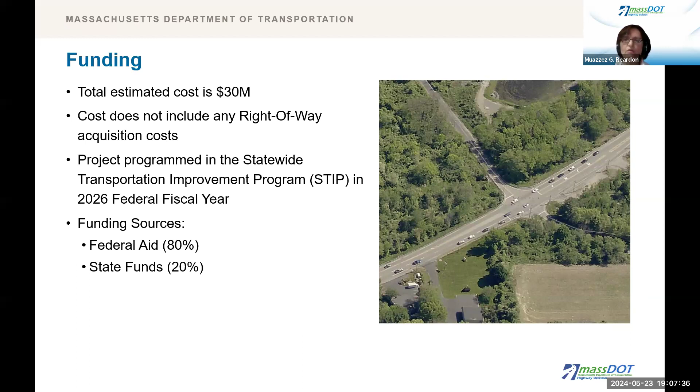We will be introducing the project, provide some history, what we are trying to accomplish, and provide information on the design. At the end, we will review our next steps and also have time for comments and questions.

The project is located on Route 20 in Shrewsbury and stretches 1 mile from the Green Street, South Street intersection to the Valente Drive intersection. For purposes of defining the existing and proposed roadway configuration, the project is split into 2 portions, the eastern portion and the western portion, divided by the wetland area near the middle of the project. The western half of Route 20 consists of 1 eastbound travel lane and 2 westbound travel lanes. The eastern half consists of 2 travel lanes in each direction.

In addition to evaluating the corridor, 6 major intersections were evaluated for improvements.

Previous to this project, MassDOT and the town prepared a master plan for transportation improvements to address existing issues and support economic development of the Route 20 corridor within Shrewsbury. In March 2020, the final public meeting was conducted for the master plan. The preferred concepts derived from public meetings showed support for shared use paths, sidewalks, and turning lanes to improve safety and congestion issues.

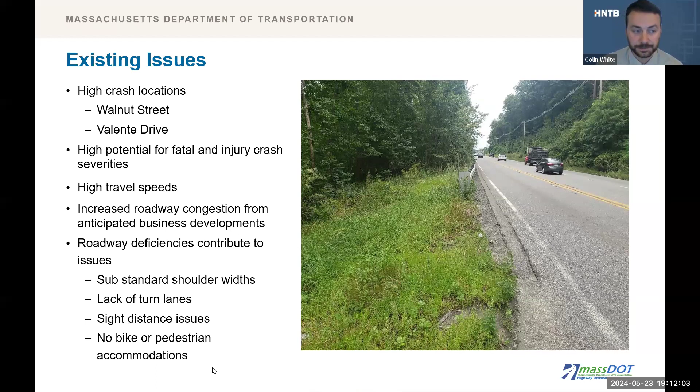So MassDOT and HNTB took a close look at the crash history of the project area. In the western portion of the project, many of the crashes were due to general congestion, left-turning vehicles onto Route 20, and the traffic signal at the South Street and Green Street intersection.

However, it was found that most of the crashes in the eastern portion of the project involved a vehicle turning left, either into or out of a side street or driveway. In fact, almost 3/4 of the crashes involved a left-turning vehicle.

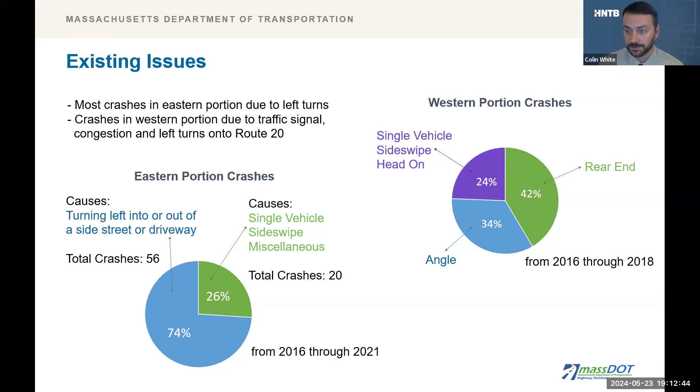So, what do we want to accomplish given these existing issues and roadway deficiencies? The purpose of this project is to improve traffic safety for all road users, including non-motorists, along Route 20 from the Green Street, South Street intersection to the Valente Drive intersection. To reduce high travel speeds, to accommodate future traffic conditions with respect to planned developments, and to improve congestion issues within the project area.

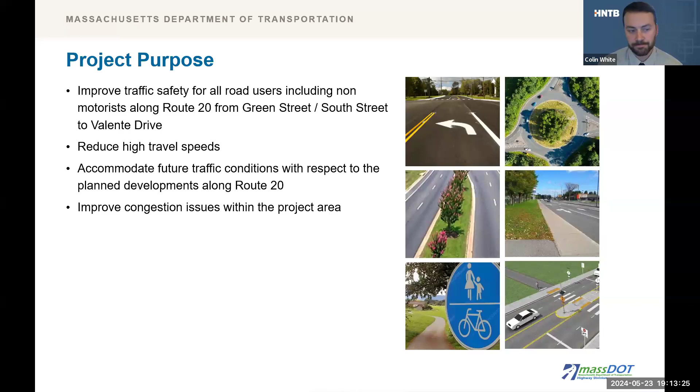So now I can get into some of the alternatives that were considered when we were starting to think about the design for this corridor. But before that, I'd like to show the existing cross sections along the roadway.

Here you can see in the western portion at the top, there's 3 lanes, one travel lane eastbound and 2 travel lanes westbound. There's also a traffic signal at the South Street and Green Street intersection. And then in the eastern portion, on the bottom of your screen, there's 4 lanes, 2 eastbound and 2 westbound.

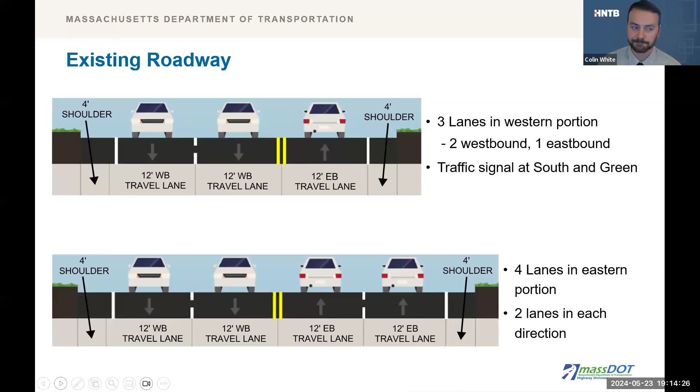This slide shows the existing control at each intersection. The South Street and Green Street intersection is signalized. And then on the bottom left, the South Street East intersection is not signalized, and left turns out are prohibited. So it's right out only.

The Walnut Street intersections are slightly offset and both not signalized. And then bottom right, the Valente Drive intersection is not signalized, and both left turn and through movements out of Valente Drive are prohibited.

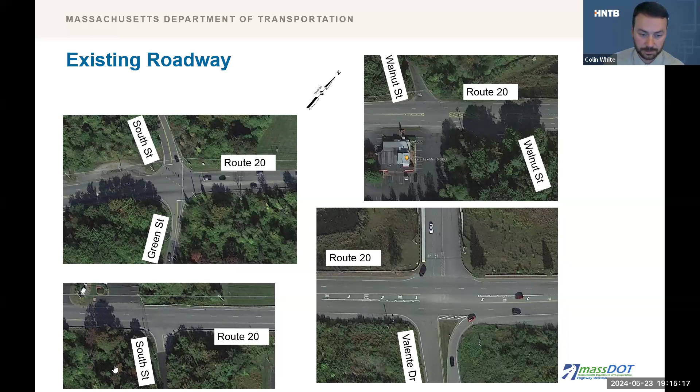So, alternative 1. This is a preferred alternative from the Shrewsbury Master Plan study, with some minor adjustments to the cross-section dimensions to meet current MassDOT standards. This alternative provides a shared use path for pedestrians and cyclists on the south side of the road, and a sidewalk for pedestrians on the north side.

The western portion of the project includes the addition of a second eastbound travel lane, dedicated left turn lanes at select intersections, and the existing traffic signal at the South Street and Green Street intersection is improved, with a new traffic signal proposed at the Valente Drive intersection.

On the eastern portion of the project, a 2-way left turn lane is provided for this alternative.

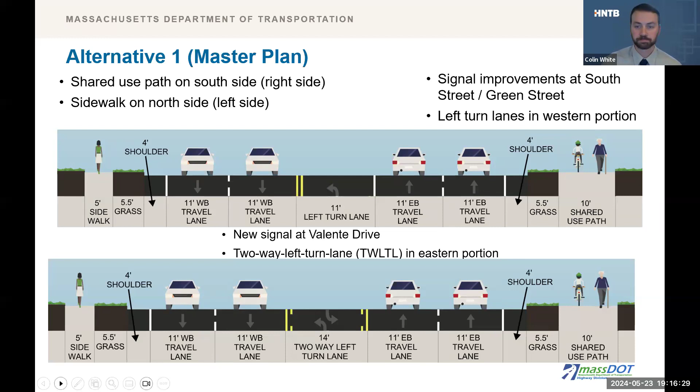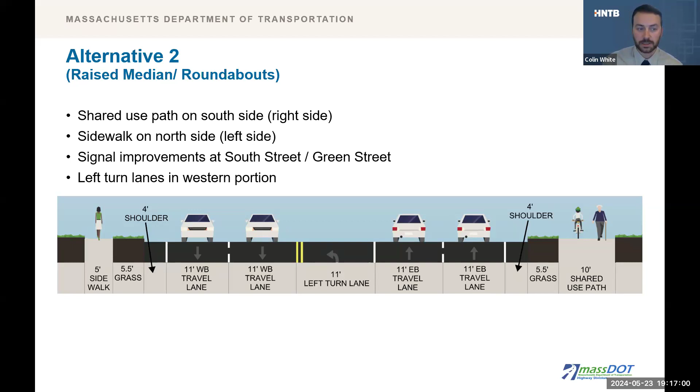So alternative 2 builds off of the master plan alternative. As in alternative 1, there's a shared use path for pedestrians and cyclists on the south side and a sidewalk for pedestrians on the north side. Also similar to alternative 1, signal improvements and additional turning lanes would be provided at South Street, Green Street, and the South Street East would remain right out only.

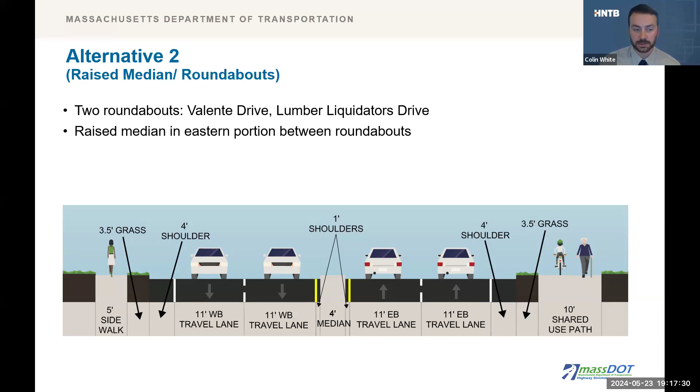However, alternative 2 proposes a roundabout at the Valente Drive intersection instead of a traffic signal, and a second roundabout is proposed near the middle of the corridor. Instead of a two-way left turn lane in the eastern portion, a raised median is proposed between the two roundabouts. This is the main difference between alternatives 1 and 2.

So what's the preferred alternative? The preferred alternative is alternative 2. MassDOT selected alternative 2 as the preferred alternative based on several factors, including safety, the ability to address the purpose of the project, and environmental considerations.

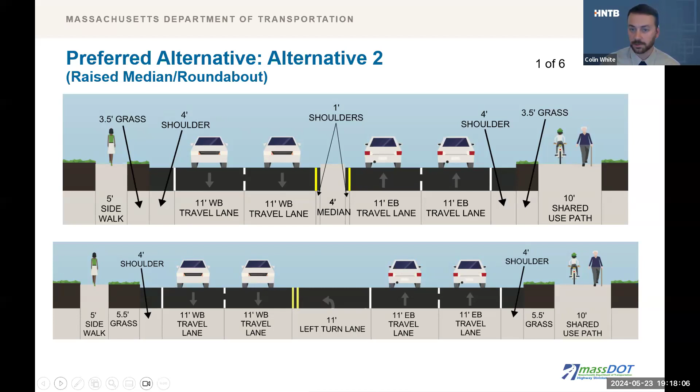Now we can take a closer look at the proposed improvements for the different areas within the project. So we can start at the western end of the project, at Green Street and South Street.

There's an additional westbound left lane and westbound right lane, and an additional southbound left lane, as well as crosswalks across all approaches and pedestrian signals for those crosswalks. Also improved signal timings and an exclusive pedestrian phase for people to cross.

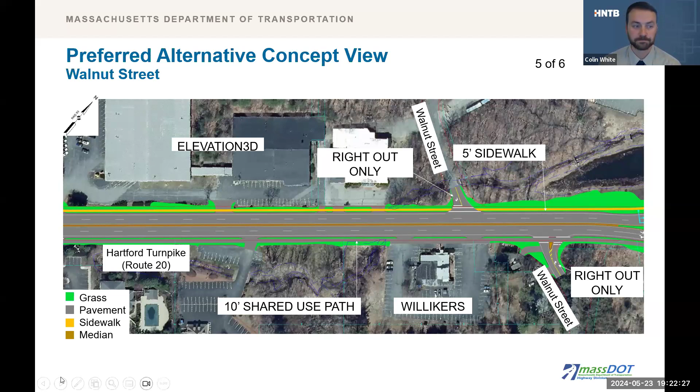Some of the benefits of this preferred alternative: unlike traffic signals, roundabouts can be combined with raised medians to better manage access along the corridor. The existing crashes associated with left turns into and out of driveways and side streets are addressed with this. Managing speeds was also part of the project, and roundabouts include deflection that requires vehicles to slow down to 25 to 30 miles an hour, regardless of the time of day.

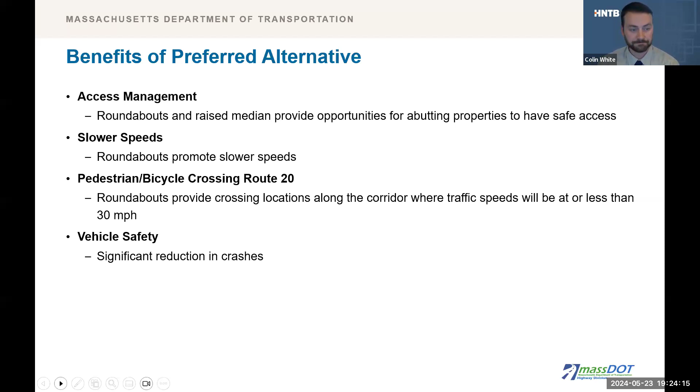Both alternatives improve accommodations for pedestrians and cyclists, but the addition of the roundabout in the middle of the project provides an additional safe location for pedestrians and cyclists to cross Route 20. This preferred alternative provides a significant reduction in the number of crashes.

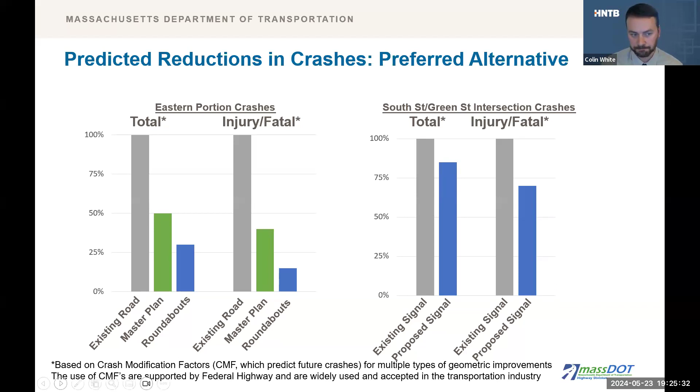So, how will your property be impacted? Now I would like to turn the presentation over to Michael Ruderman, representing MassDOT's Right-of-Way Bureau, to discuss the right-of-way process.

Thank you very much, Colin. My name is Michael Ruderman. I am a member of MassDOT's Right-of-Way section. The Right-of-Way Bureau is charged with acquiring all of the rights, whether temporary or permanent, private and public land, for the design, construction, and implementation of this project. We are governed by state and federal provisions that instruct us in the proper way of going about this.

Primarily, these provisions are about notice, about how we must present the project to any owners whose property will be affected. Affected property owners' rights are protected under our state constitution, Mass General Laws Chapter 79. As this project does receive federal funding, there are federal protections as well under Title III of the Real Property Acts of 1970.

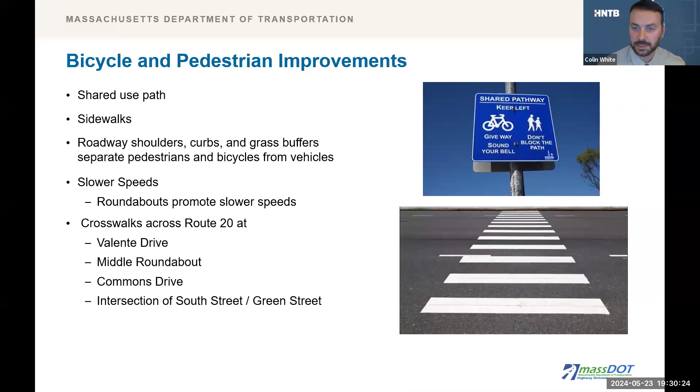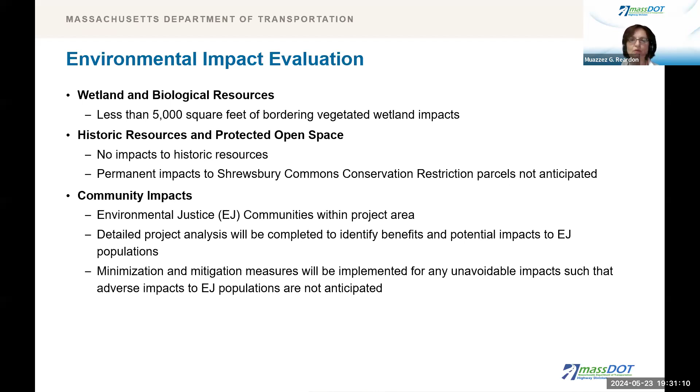So, environmental impacts. I will now give the presentation back to Muazzez to discuss environmental permitting and finish our presentation. Thank you, Michael and Colin. Measures to avoid, minimize, and mitigate environmental impacts during project construction will be implemented. As the project advances, any impacts that are identified will be reviewed by the appropriate agencies. The town and its residents will be notified and engaged throughout the entire permitting process.

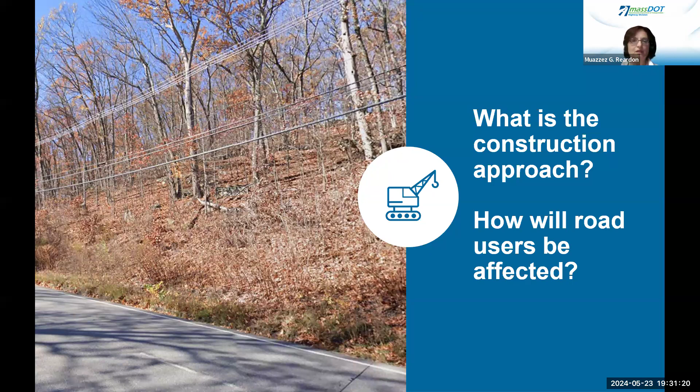What is the construction approach? Access will be maintained during construction. There will be lane closures and traffic shifts. Bicyclists and pedestrians will continue to have access to the roadway during construction. If necessary, roadway closures and detours will be limited to short durations.

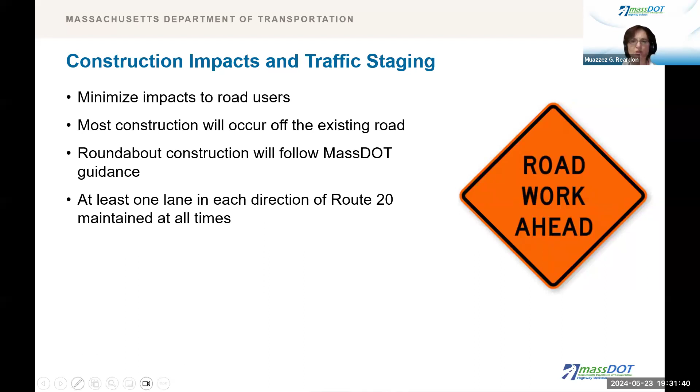After this design public hearing, we will work on the next design submission, which we refer to as the 75% submission. This will be submitted later this summer. The design is expected to be advertised and bid in 2026.

Your feedback is very important to the success of the project. In addition to this meeting, we encourage you to reach out to us with written comments. Emailing us at the address shown on the screen is preferred: MassDOT project management at dot.state.ma.us. We encourage you to do this within 10 business days of this presentation, so your comments can be incorporated into the design where feasible. Please be sure to include the project number 610825 in the subject line of your email.

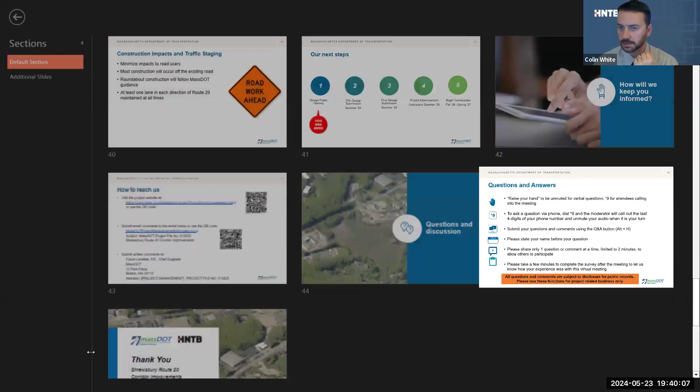Yeah, I can take that. And if you wouldn't mind going to slide 30, you can kind of look at this location. So like John mentioned, this is Valente Drive and the Shrewsbury Village Drive, and this is, as you stated, at the top of the hill, basically the crest.

So what the roundabout does that's really good for this situation is slow vehicles down to 25 to 30 miles an hour, or maybe they even need to stop if there's someone already in the roundabout. And no one's making a left turn. So a lot of the issues that you see out there today won't be there with this roundabout design. You'll make a right turn into the roundabout and then exit right out of there. The sight lines have definitely been considered, and you don't need as long of a sight line if the vehicles are going slower, so that also helps.

Was that plans to lessen? So no, there are no plans to reduce the profile to lessen the hill at all. But this roundabout should improve a lot of the safety issues that you see today.

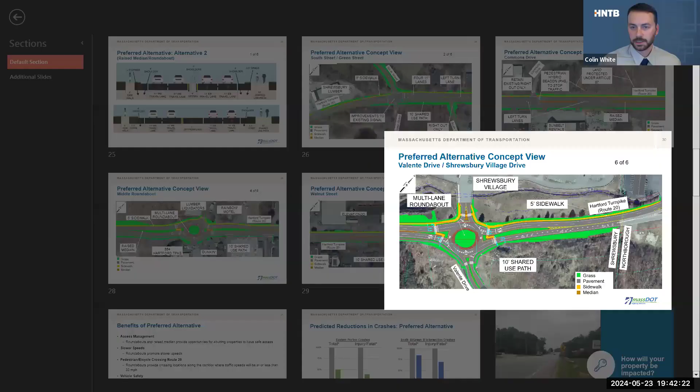I can start off, see if anyone else wants to jump in afterwards, but I think I know what you're talking about, and that is outside of our project limits. If the plans are finalized, we can take that into consideration for the traffic patterns at both intersections on Route 20. But yeah, that is outside of our limits.

Alan, I'll add that there are discussions the town is having about building the connector between South Street South and Green Street. As Colin said, at this point it's not something we're including in the project. The proposed plan assumes that connector isn't in place, and that people coming out of South Street South would take the right turn and use the proposed roundabout in the middle section to reverse direction, providing access to head westbound on Route 20 or towards South Street North. Certainly, if the town's plans regarding that connector road are advanced, we'll account for that in our project. Thank you for the comment.

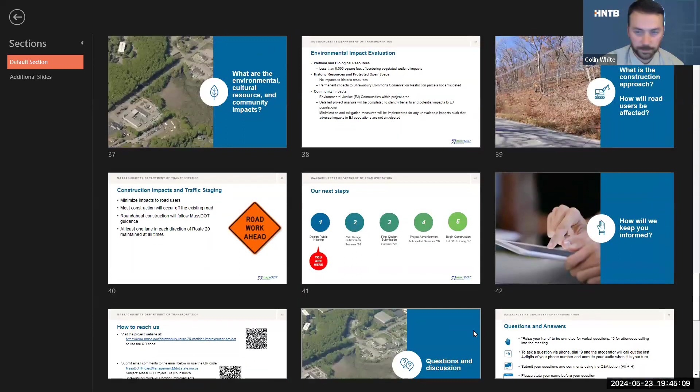Yeah, I can start us off again. Yes, we definitely simulated traffic in the roundabouts. In fact, we took traffic counts which include classifications, so we know what types of vehicles are there, the truck percentage, and apply that to our analysis. So all those trucks are included in the operations of these roundabouts. One thing about roundabouts versus traffic signals is, unless there's someone in the roundabout, you don't actually have to stop. So we see that as a benefit to trucks, sometimes they can keep rolling through versus signals.

Will double tractor trailers be any issue with the rotaries also? One thing about these specific roundabouts is that they're two-lane along Route 20, which does give more space for trailers when the trucks are turning. And in terms of the snow banks, I don't think it'll be an issue, but maybe maintenance or someone else from MassDOT can speak to that more.

Sure, Colin. I'll mention from the district's perspective, we've built quite a number of multi-lane roundabouts in the last 10 years or so, and our maintenance forces have gotten quite a bit better at dealing with snow removal in roundabouts. Certainly during the middle of an event, I'm sure there will be some snow within the roundabout, like there is at most of our intersections. But we'd be working with our maintenance forces to make sure that as the storm wraps up, they can push the snow off the roadway within the roundabout itself and clear the apron provided for truck movements. So it's not something we'd expect to be an issue, and we'd certainly be working with our maintenance staff during final design to make sure we're accounting for snow removal as part of how we design both of these roundabouts. Thank you.

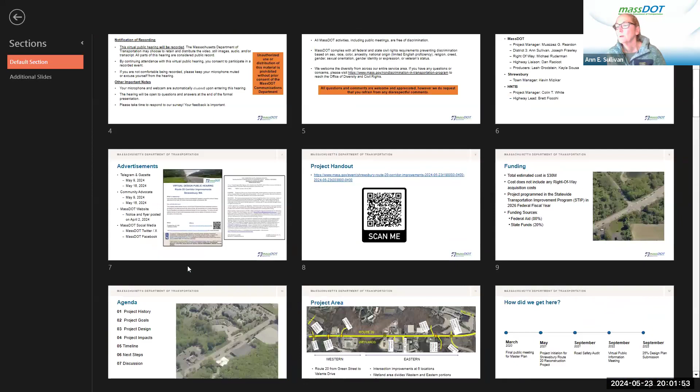You will — I don't know what the difference is. Do you know, Colin, the distance between this and the roundabout? I'm not sure, I'm not familiar with the location of that. I mean, there will be opportunities — it's a long distance to get to the roundabout we're building, but let me just measure it quick.

Yeah, it's 1.5 miles. So we're aware that it's kind of a difficult location, and we are looking at trying to provide some safety measures to help out with it.

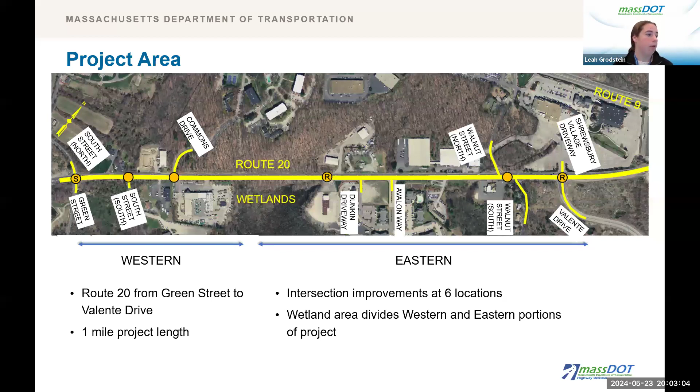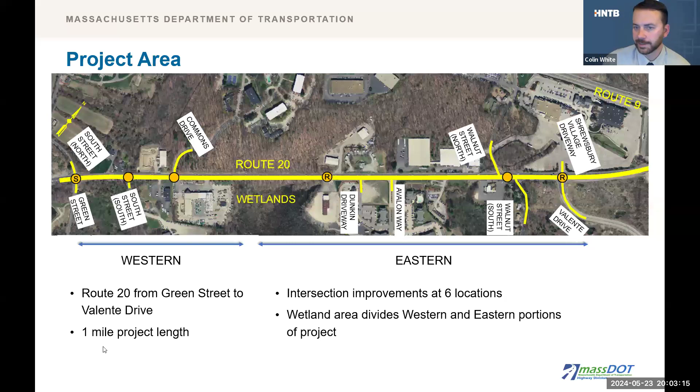If there is a desire for pedestrians to cross, we certainly want them to cross at crosswalks. That is the safer option, especially here with proposing some pedestrian hybrid beacons where they have to stop for a red light. I think the impacts to vehicles driving along Route 20 and the delay might not be that impactful, maybe not as much as you think.

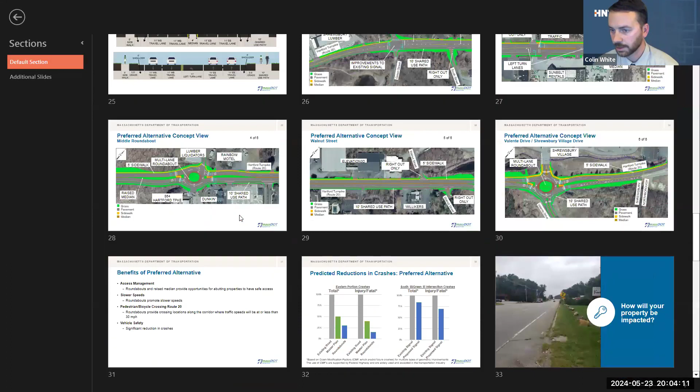We did not think that it would be too impactful to traffic operations. And then for South Street, if we go to slide 26, we could look at what's proposed there again. So right now we know there's been issues in the past, and I believe that's why the town made that a right-out only, even today in current conditions. So we're going to keep that right-out only, so that people aren't trying to make a left, but they will be able to go down to the middle roundabout to make a U-turn to then continue west on Route 20. Additionally, going into South Street from the east, there will be a left turn lane where a vehicle can safely wait in its own lane, not the through lane, until it finds an acceptable gap in the traffic and then make its turn.

Thank you, Colin. The next question is from Diana. With the anticipated large warehouse off Centech Boulevard, will there be changes at that intersection, and when might that be? Thank you, Diana.

I'll mention again that in terms of improvements at that intersection, it will probably be largely driven by the UPS development that is proposed, and so we would anticipate that development would likely require some changes at the intersection, but right now that is something that MassDOT will be working with the town and the developer to address. So we don't know exactly what kinds of changes that would entail and when those changes would be implemented.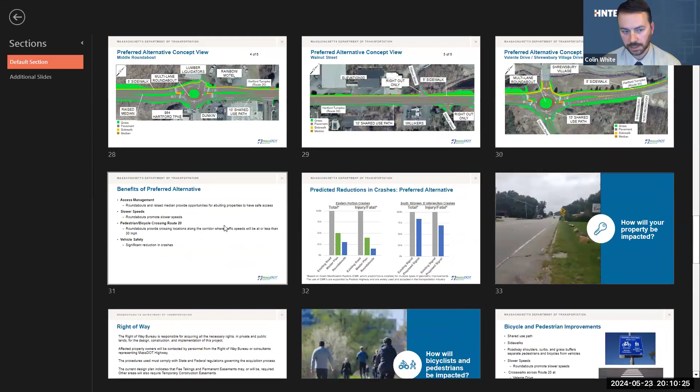Great questions. If you could go to slide 28, we could see the Dunkin' which also serves the Granite Works driveway there, to the right of the roundabout. The fact that these are right-in, right-out really helps. No one's trying to make a left turn. It is close, and Dunkin' is one of the higher-use driveways here, so it's a good point. But we believe it's far enough away from the exiting lanes that people will be able to safely make an entrance to Route 20 or an exit into the driveway.

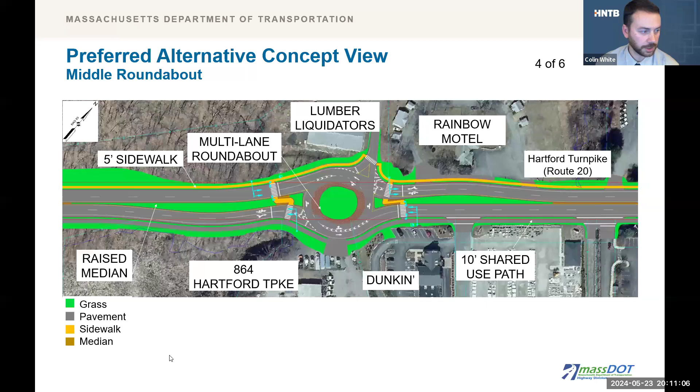And then just to go to slide 30, you can see in the right lane there, to the right of the roundabout heading eastbound, we are proposing some pavement markings that will say Route 9 only. Before the roundabout, as you're heading towards it eastbound, we will have signs to try and get people into the correct lane even before they reach the roundabout, so that if you want to go Route 9, you're in the right lane, and if you want to continue on 20, you're in the left lane. This is something we've definitely considered. It's a good point.

Excellent, thank you. The next question is from Diana. Entering Route 20 from Lake Street at the new Market Basket has challenges, especially when school buses are trying to return into their parking area and traffic blocks them from turning left into that bus parking area. Are there any plans to restudy this area now that it is developed? Thank you, Diana.

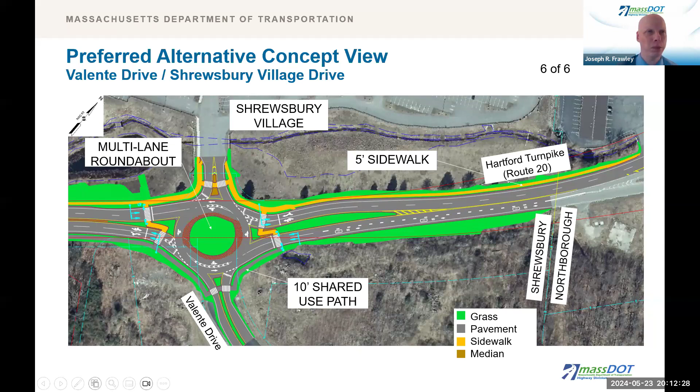There aren't really plans to restudy the area at Route 20 and Lake Street, but certainly if there are adjustments to traffic signal timing and things like that needed since the development has happened and we have real traffic instead of projected traffic, that's something the district office would tend to do. We can certainly take a look at that location and see what kind of timing improvements we can try to make to help things work more efficiently there. Thank you.

Thank you. The next question is from Cindy. Will there also be a left turn lane into Commons Drive? Yes, there will. If you go to slide 27, you can point it out. Commons Drive is at the top there, and you can see a left turn lane on the left side for vehicles wanting to turn into Commons Drive. This is also where the crosswalk will be located.

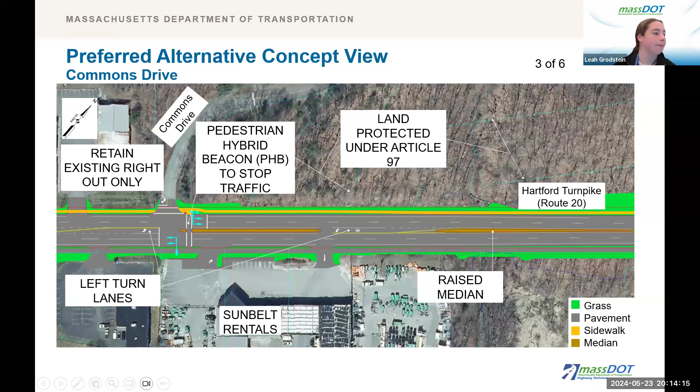These are very good questions that I don't have off the top of my head. Average daily traffic, we were looking at future volumes of maybe like 24,000 a day on Route 20. Peak hour, I'm trying to remember, might be around 2,000, but those aren't exact numbers, just generally. And then the roundabout throughput - our analysis showed that they would be able to operate well with minimal queuing at the roundabouts. Exact throughput, I'm not sure of that number.

I don't know if it makes sense to go back to the slide with the email, just to remind people that they can follow up via email with some of these really technical questions that are sometimes hard to recite data on the spot here. Right, you took the word out of my mouth, actually.